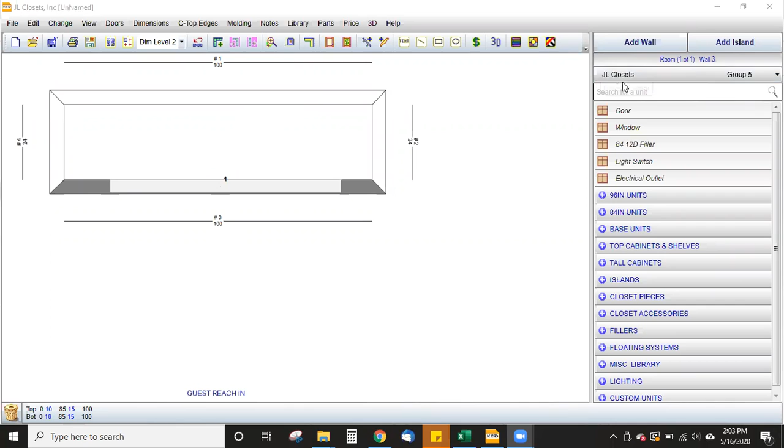Now that we have built our walls and put our door in, we're going to put fillers in. So the most important thing is to start with our library. You can just click on this, it has a drop down, or you can come up to library and choose JL Closets. So once you do, the easiest way to do it is just to type it in.

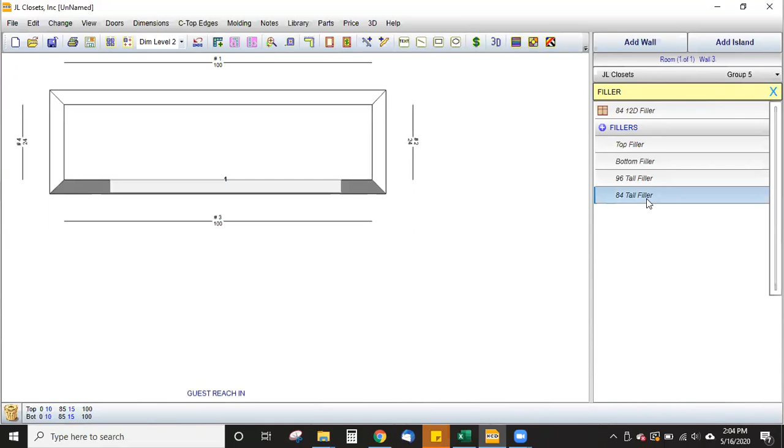Because in this particular room, we only have a 96-inch ceiling, we're only going to build 84 inches. Generally, in reach-in closets, because of the soffit, we're also only going to build 84 inches. So I'm going to choose an 84-inch filler. I'm just going to click it once and notice that my cursor has an arrow up. I'm going to come over here and just drop it anywhere.

Doesn't matter how big it is when I drop it because I'm going to change it here. I'm going to make it 0.75 or 3/4 of an inch. We're always going to do one on the walls, no matter what. If we go wall to wall, there will always be a filler. And because here we're going from wall to wall, we need to have the fillers. So I'm going to start with the left. I always, just like reading, start left to right.

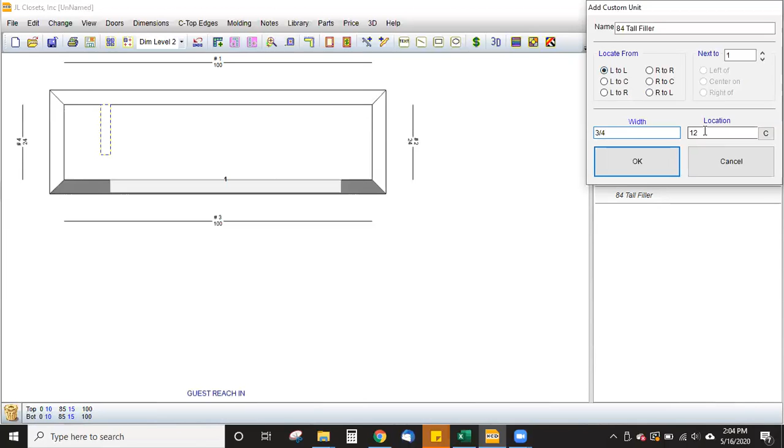I'm going to start with my 3/4 inch filler. It's going to be on 0. 0 means it's 0 inches from this left wall. So I'm going to hit OK, and it's going to move my filler all the way over to the left. For some reason in the system, they're pre-programmed at 16 inches deep. I only need 12, so I'm just going to change it and hit OK.

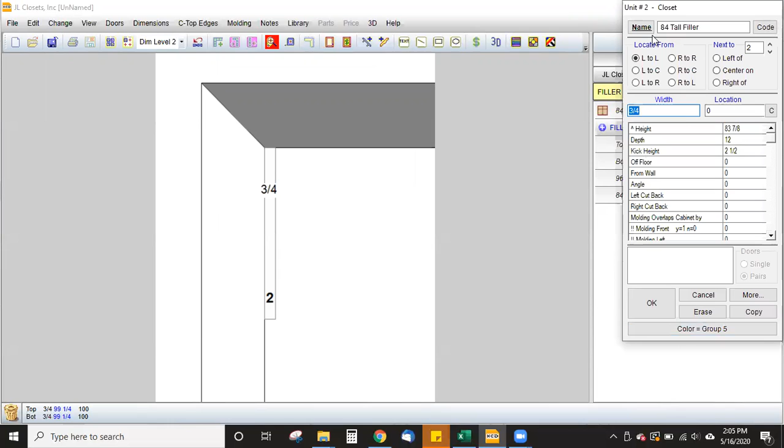But if you need to manipulate anything, all you have to do is double click on the number and then manipulate this box. So we already said we wanted it to be 12 inches. What I just did is the magnifying. So I wanted to zoom in on this particular area. You just click and drag it, and then click the magnifying when you want to get out of it.

So I want to copy this to this side. You can do it one of two ways, and I'm going to do them both ways. I'm going to draw another one. But did you notice how, I'm just going to hit cancel. See how it goes up and down? That's how you know it's going to be on this particular wall.

Sometimes the fillers get a little funny. And do you notice it's now horizontal? So it's actually going to be on this wall. It's not where I want it. So I'm just going to click and drag it up and over until it's on the wall I want. Again, 3/4 of an inch. I now want it to be on the right side, which is going to be here, and 0 inches from this right wall. And then I would have to double click again, make it 12 inches, and now I have my fillers.

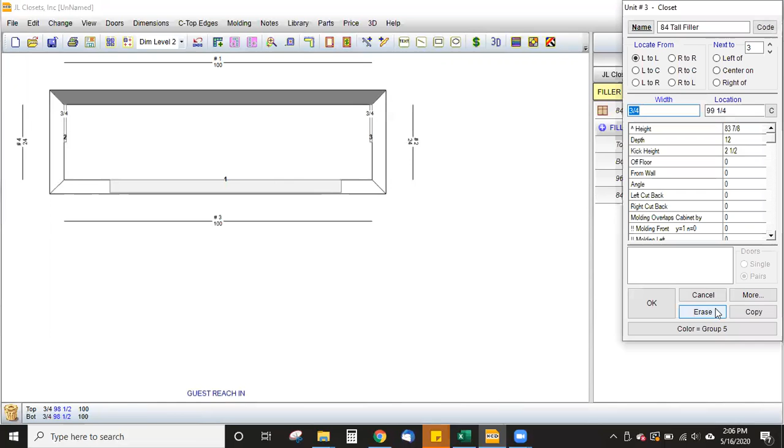The other way to do it is just to copy it. So I'm going to delete this, and again, there are several ways to do this. You can double click on the number, hit erase, or you can click it and drag it all the way to this garbage can. So I'm going to copy this, double click.

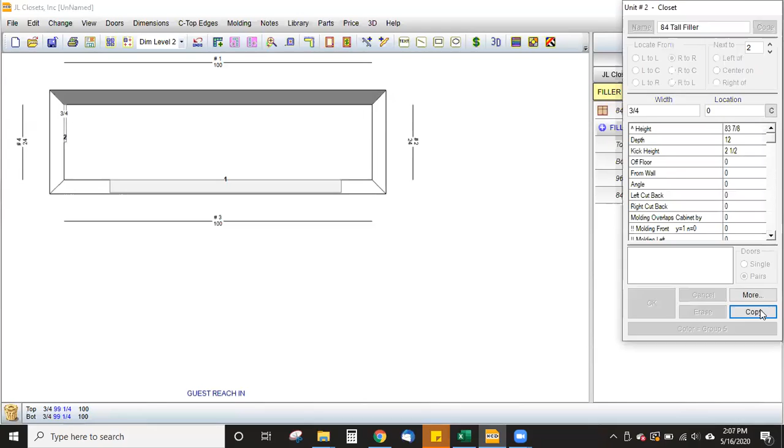I'm going to go right to right so that it ends up the same exact 12-inch deep, 83 7/8 of an inch tall filler. So I want it to be right to right, 0, and I'm going to hit copy. If you don't hit copy, the only thing it'll do is move it over. So now we have added fillers.